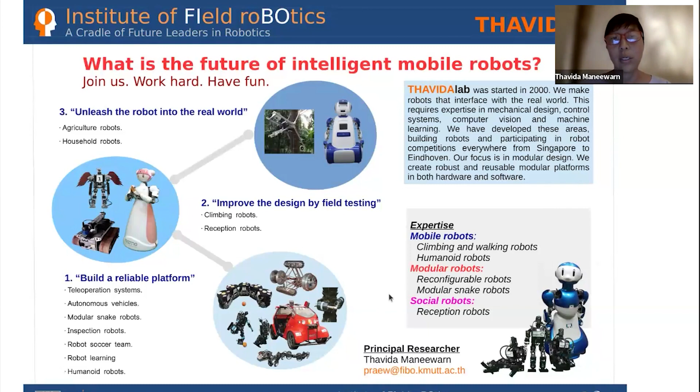That's why I started a company. I worked at Yanix, which is like a visual effects company, doing a lot of 3D reconstruction, camera tracking, and stuff like that using computer vision technology. Today I'll talk mostly about my new company, Raina Robotech, which is the agricultural robotics company. But since you guys are Power Energy Society, I just want to show a little bit of my old robots that I built. This one is for EGAT, the Electricity Generating Authority of Thailand.

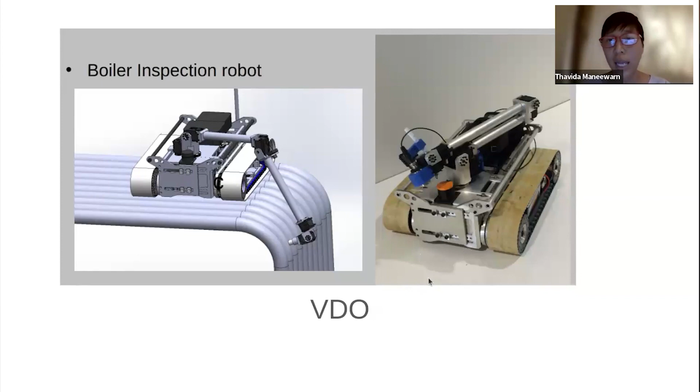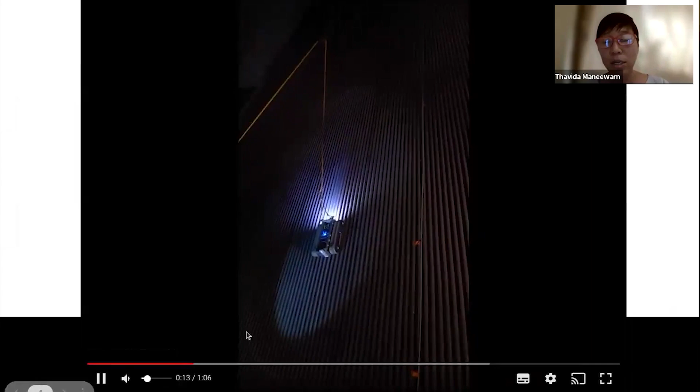So this is the robot that we use to inspect inside the boiler, and it's a climbing robot. So we built a magnetic wheel type robot.

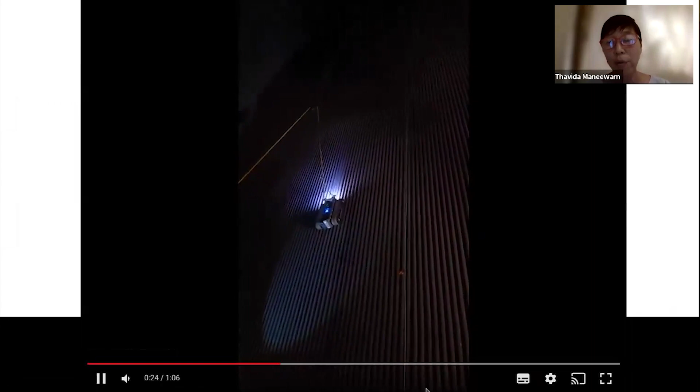So to give you guys some idea, this one we inspect pipe inside the boiler.

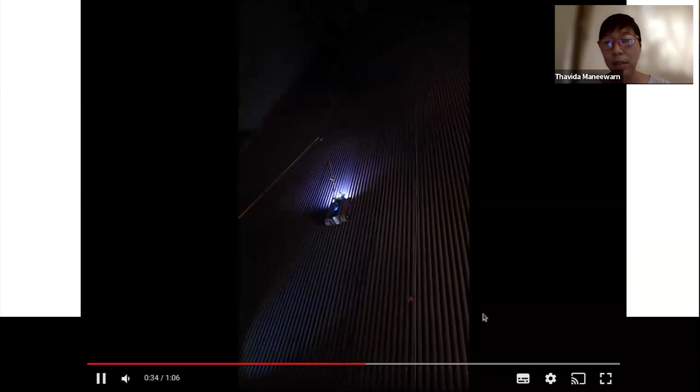Dr. Thavida, just a small question, I hope it's okay.

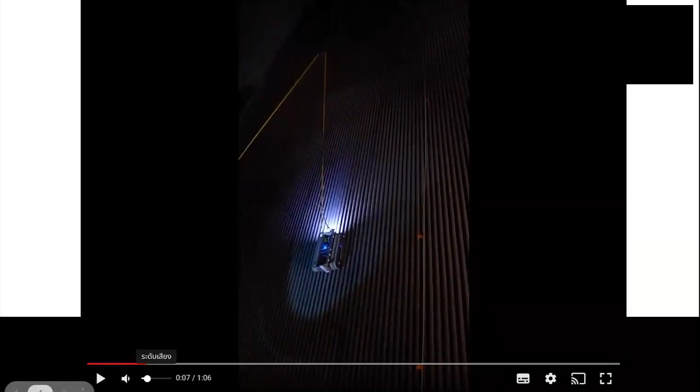Any other thing, like what is the environment temperature in this particular pipe that you operate? Is it just room temperature or different? It's room temperature, because this is inside the boiler. So we only inspect it during the shutdown time. The engineer has to check for corrosion, like if they have to cut the pipe down and then re-weld it. That's why we send up the robot.

So it's about like 5-story high, like 20 meters up. This one we had a certain type of sensor on the arm of the robot, so it can detect the thickness. So it's to test the thickness of the pipe to see corrosion.

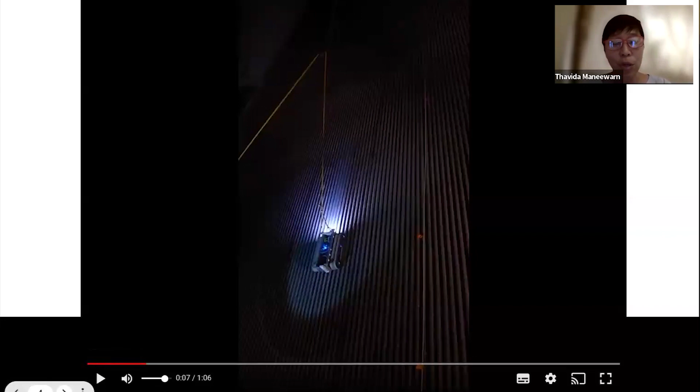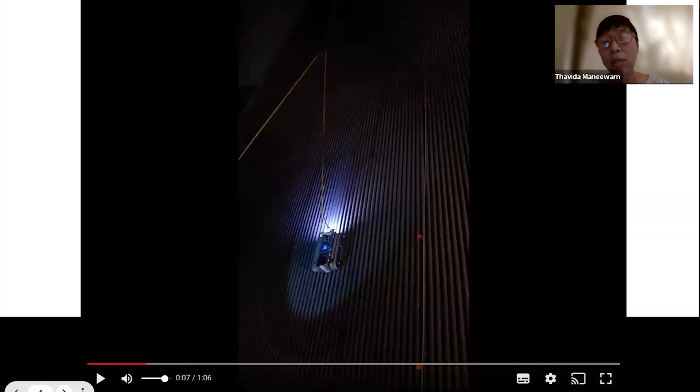But if you look at the future, I can actually talk about the past. This group of work that I did, I call it a service robot that we did for pipe inspection, and sort of like this one is the boiler. So we did a lot of climbing robots for different types of surfaces.

Therefore, to contribute our work into something that can help with sustainability, it's something that we as engineers have to think about, like how can we contribute to a better world. That's why during the COVID year, it's interesting that with COVID everywhere in the world, for me, for example, after sitting at home for a while, I couldn't go out.

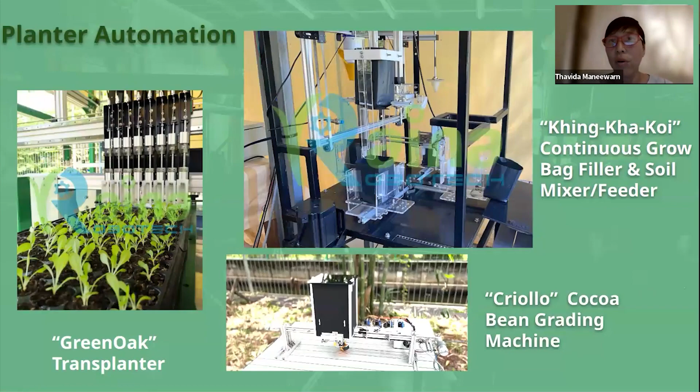Next I'm gonna show some video. Let's see. So let me get back to the beginning. So this one is a cocoa bean grading machine.

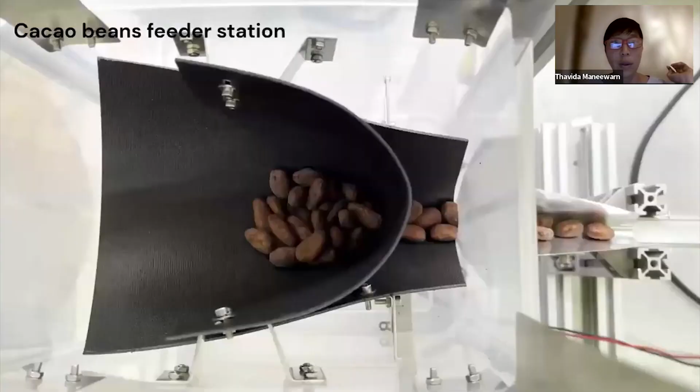We made it very low cost because it's like a prototype that we want to show to the community, the cocoa producer community in Phetchabun. So this one is built very cheaply.

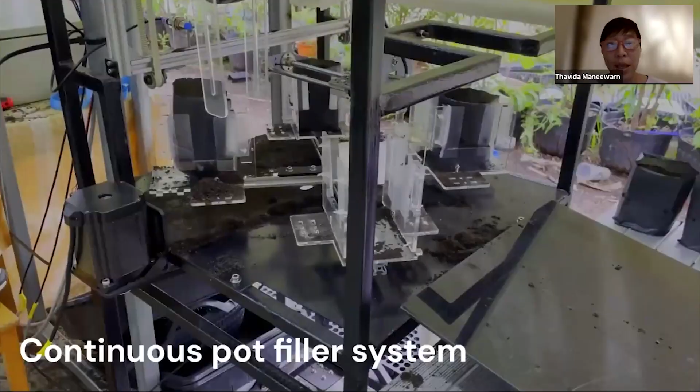So this one is the continuous pot filler. The grow bag feeds one by one continuously, so no human is involved, and then it will fill with soil.

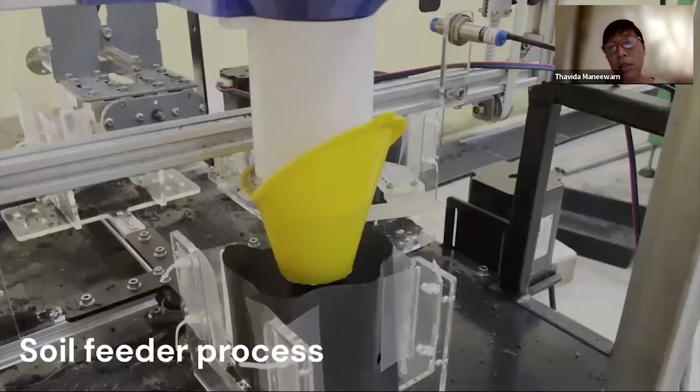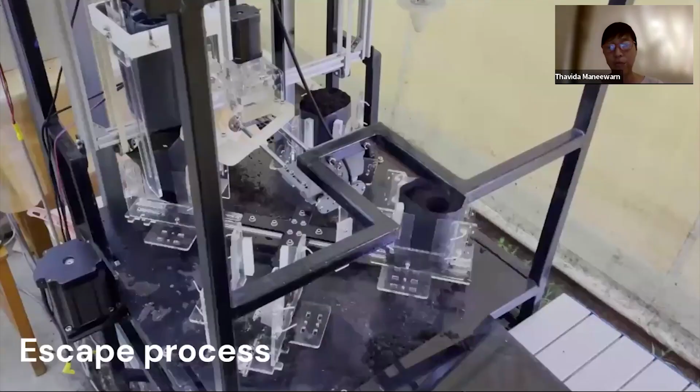So this one, we collaborate with the asparagus farmer. When they start asparagus seeds, they do it in the bag, and we grow the seedling in the bag before planting in the field. That's why we did this for the asparagus farmer in Ratchaburi province.

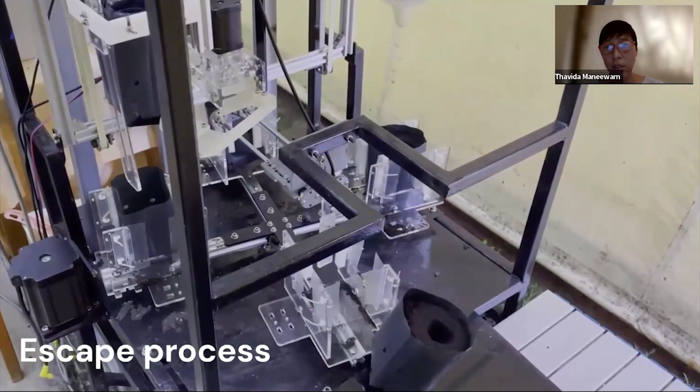Yes, so this is very quiet because it's all electric.

It's slow because of the design, since one of the engineers wanted to make it all like a station. If you want faster production, it's actually better to do it like a line, a feeder line. That's like a circular system, but it's cheaper with one motor to do multiple things.

So 14 or 15 seconds means you get about four bags a minute. That is also a good rate, I guess. Something like that, because their volume is not high, but I'll show you later.

It's our company product, which is the transplanter. That one is a lot faster - it does the seed tray. So the volume of the farmers also determines what the speed of the machine should be.

Okay, go back to the slides again. So the next group of products - we have two lines of product. The previous one is the planter, which is stationary things.

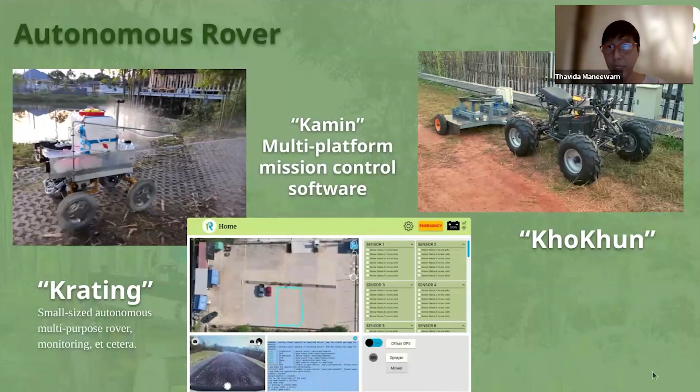So these are my lines of autonomous robot. From testing these robots, the Khokhun prototype we have currently is a two-wheel drive, battery electric, all electric, and it has three modes of operation: manual, so I can ride it like a vehicle, like a small tractor basically.

We equip it with multiple attachments, so you can use it manually, or use it with remote control - the whole vehicle can be remote controlled - and you can also use it in autonomous mode.

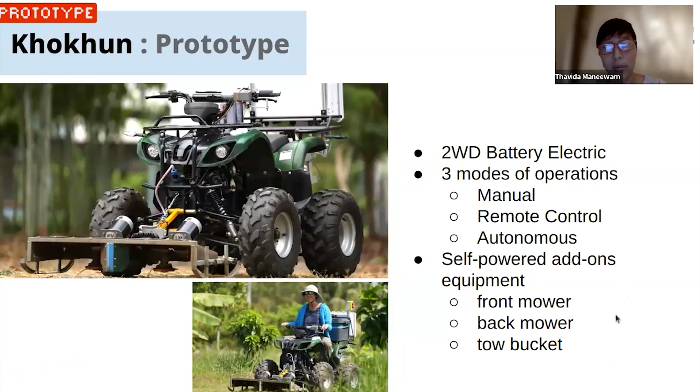The self-power equipment, meaning all the attachments like the front mower, the back mower, the tow bucket and things like that, is all self-powered. So it doesn't require any power from the main vehicle. You can power it differently, and it's all electric, so it's very quiet. In the video later, I will show you when it's done on the farm.

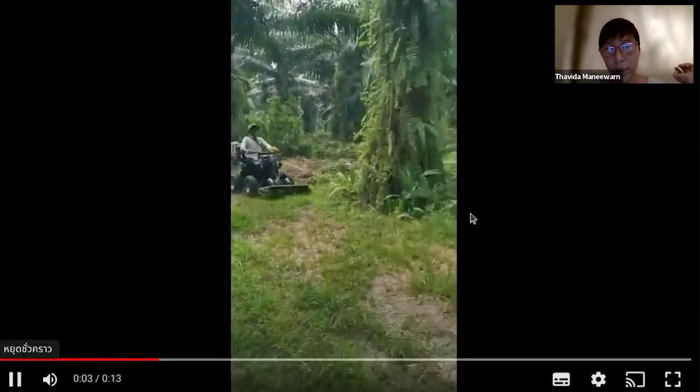For the moment, this is when we had the farmer test it at the palm oil plantation, using it to cut grass.

The good part about this, after learning from using it, is that with electric mower heads and electric machines, the vehicle is a lot quieter, has less heat from the engine, and has a small turning radius.

With the front mower, currently the farmer uses a tractor with a tow cutter, or a back cutter which you can't see. When they want to cut around the tree, it's quite difficult. But with this front mower, they can cut around the tree very easily, and that's one of the advantages of the design.

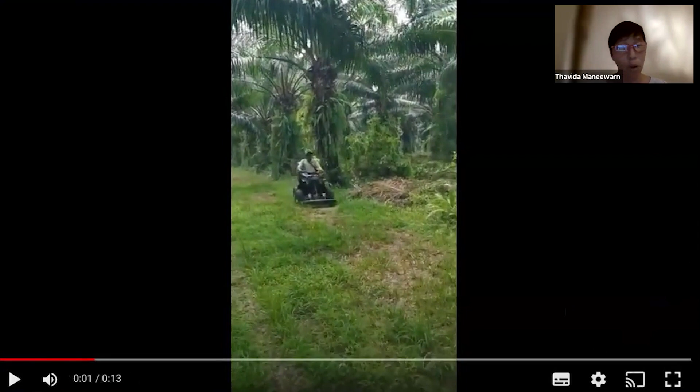And if you don't want to use it anymore, you can take the front mower out and drive the vehicle to the market or to the farm for inspecting.

So here it comes, our first product as a mass production item. We're going to sell this as a multi-purpose EV for farming. The idea is that we strip out the expensive part of the machine, which is the autonomous capability. So the product we sell now will not be autonomous, but this first product will be EV.

Farmers can buy it, and we designed it for use in fruit orchards and plantations, like in the video. We're not focused on building this as a tractor, it's more for orchards, for fruit orchards. So the needs it has to serve are mowing, basically cutting grass, and spreading fertilizer to the trees.

They can also use it for towing and harvesting. This product will be all electric, can have self-power attachments so you can change the front or the back, and it has a swappable battery. So when the farmer wants to drive and power a pump 5 kilometers away, they can do that using this battery.

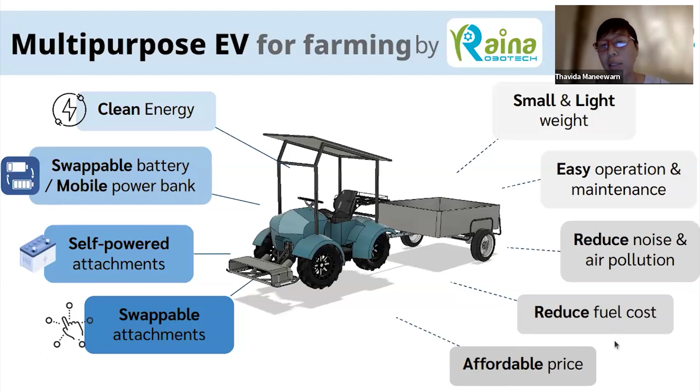The other project that I currently work on and proudly present is the concept of Raina Robofarm. Raina Robofarm is the demo farm, the real farm we built in Bang Mot area in Bangkok. It's circular organic vegetable production, the idea I mentioned in the early slides, that vegetable or food production can be entirely circular.

Why is it circular? Because it's difficult. In Thailand and other countries, the problem in urban farming is that you don't have space and you don't have labor.

There's a lot of waste when we buy vegetables from a market now—everything is packed in plastic, a plastic box or plastic bag, creating a lot of plastic waste.

At Raina Robofarm, we have a new concept: we're going to produce and sell living vegetables in a container. So we don't sell cut vegetables—we sell the whole vegetable in a container, like a pot or a bag.

That way, when a customer buys it, they can either cut the whole thing and eat it right away, or just take some part. If you buy a chili plant, for example, it can last a couple of months—you can pick it when it has chili, then wait and come back again. Or kale can last for a year if you pick it and put it by the balcony with some sun and water. So one plant can last a long time in the container with soil.

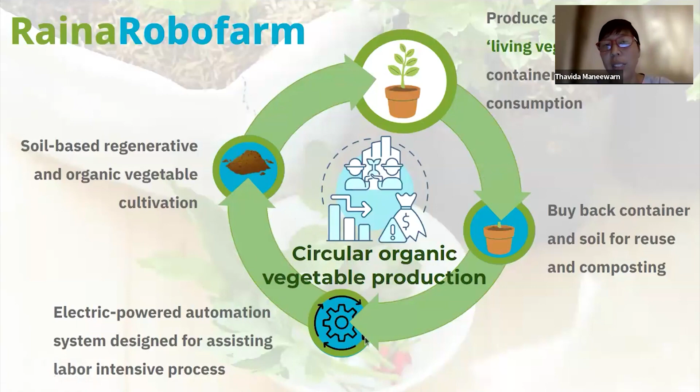Everything is done by electrical power system—all the machinery is electric powered, which is quiet, so it works well in an urban environment and doesn't produce air pollution. That comes back into the soil. So the whole process reuses the soil and the bag—nothing is wasted, everything goes 100% back in a circle. That's the idea of the farm.

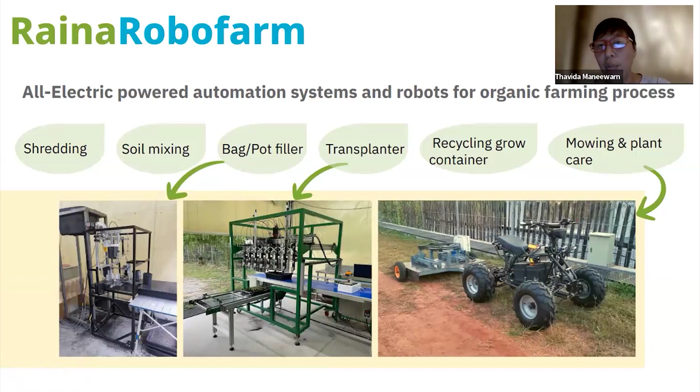At Raina Robofarm currently, we have the process of shredding and mixing soil, putting it in the bag or pot. We have the transplanter, and we have the rover that can help in the farm. It's a demo farm so we can show people how these things work.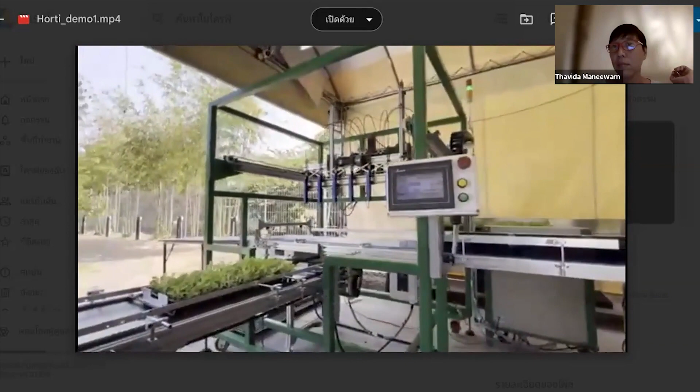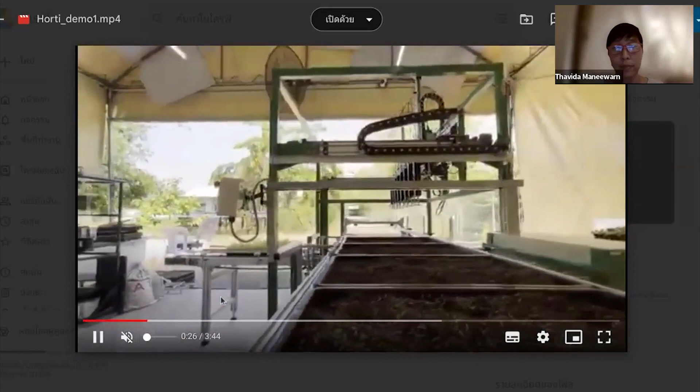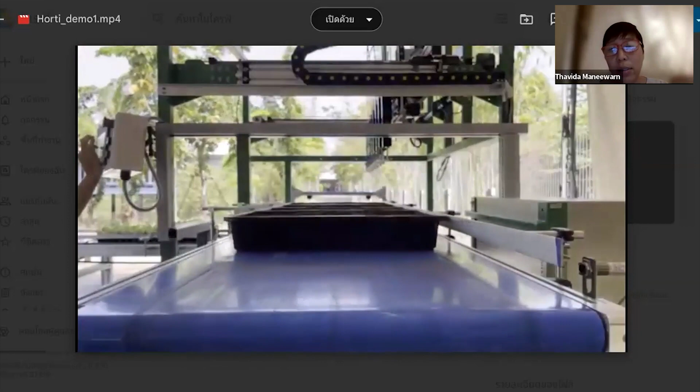This is the transplanter machine at the farm. We prepare soil in the tray, and the vegetable is in the seed plug. When the seed plug is loaded, it will be transplanted into the tray.

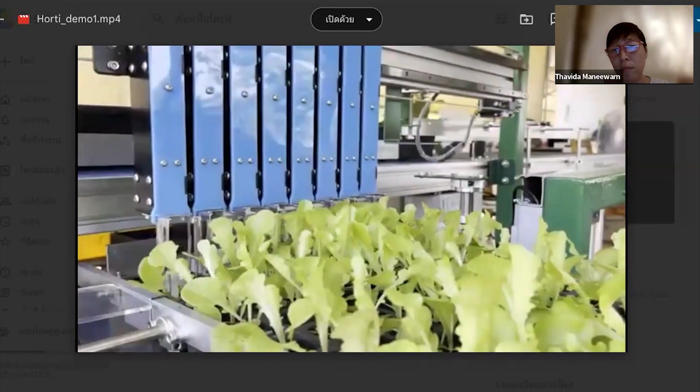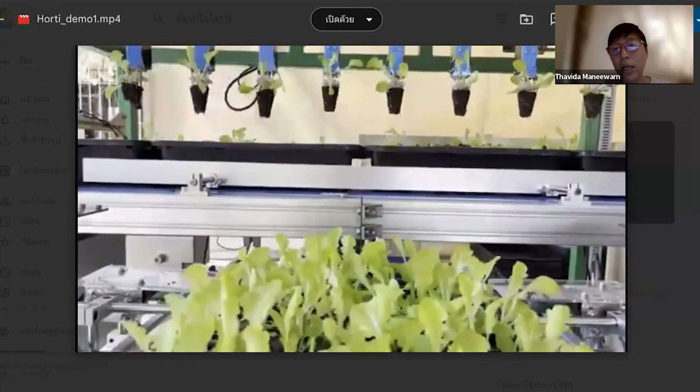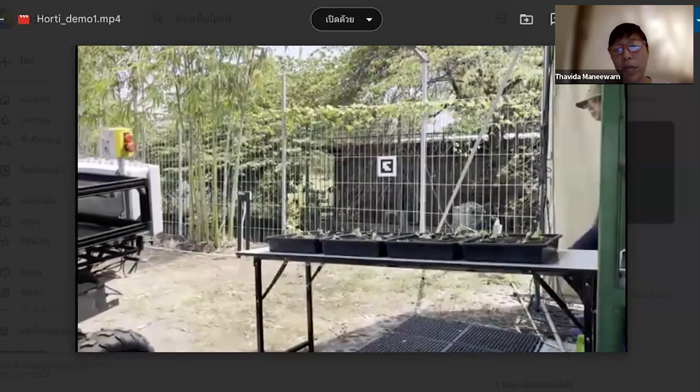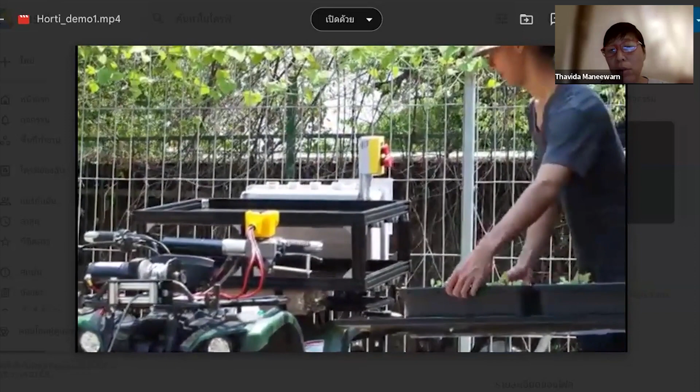After the vegetable is transplanted to the tray, we transport this tray, and the next set of trays comes in to be transported. This isn't fully robotic—we have a human farmer who loads it into a robot, and the robot takes it to the planting station.

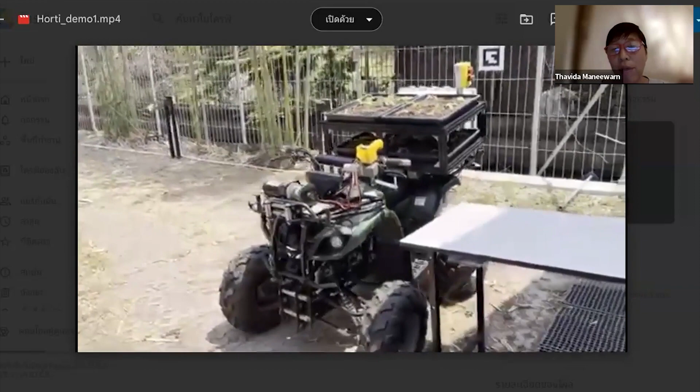From the transplanter, the robot navigates it to the grow area, guiding it there.

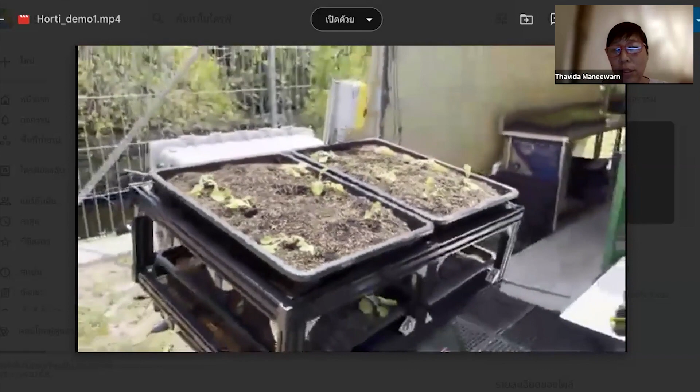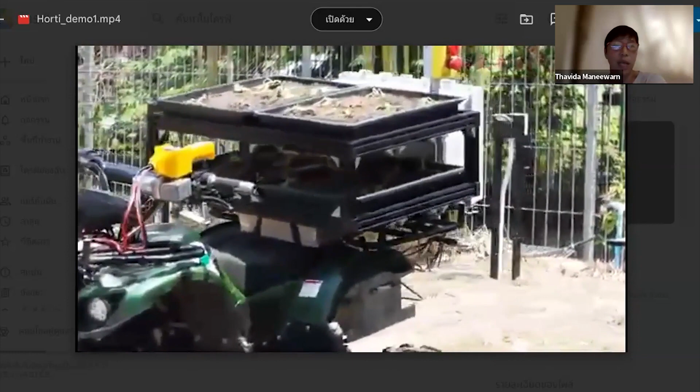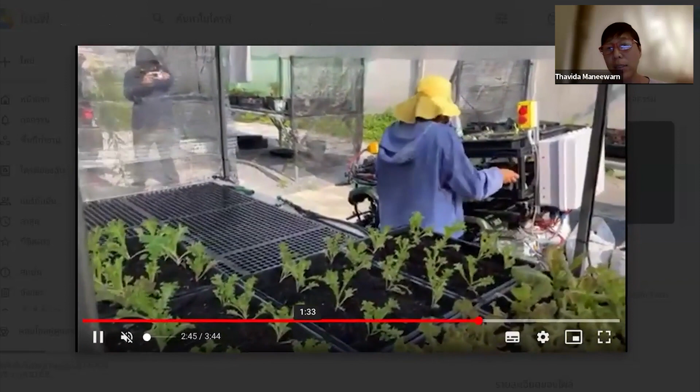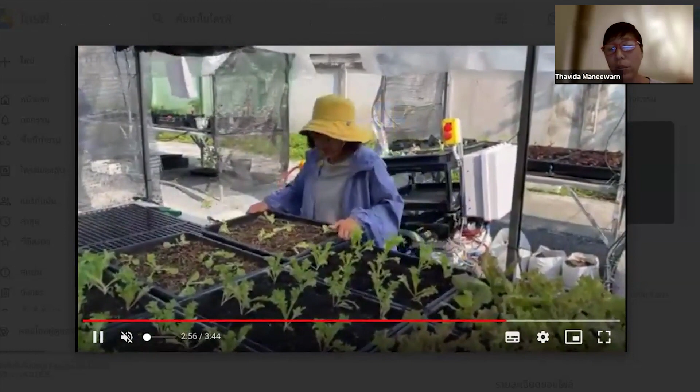Then the farmer unloads the tray into the growing area. There, we've already installed a watering system and a sensor system so we can detect the state of growth, and by doing that we know when the vegetable is ready for consumption and how many plants are ready to sell.

This is the Raina Robo Farm pilot farm in the Bangmot area of Bangkok. So that's my little project called Raina Robo Farm.

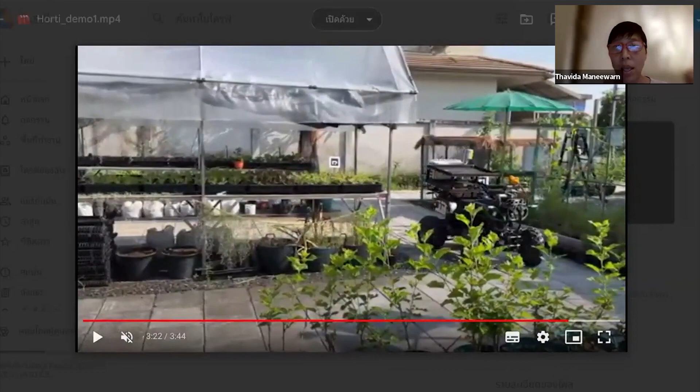With the Raina Robo Farm, we have an application where you can select ready vegetables and collect credits when you return them. People can also volunteer their time to collect credits, so when they purchase produce they can get a lower price by doing work. In the app you can keep track—whether you help in the farm for 15 minutes or 5 hours, it contributes to your credit to buy vegetables.

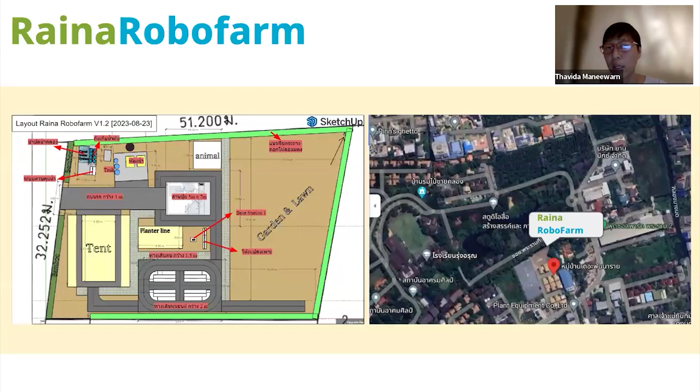This is Raina Robo Farm. If you have a chance to come to the Bangmot area, this is where we are, next to Rungarun School near the Rama 2 area—this is the actual farm location.

I want to show people that we can actually create food in urban communities. The idea is that everyone can grow vegetables, because even if you're young, a woman, not strong, or have health problems, you can still be part of the farm and help a little bit. We use these activities to introduce people to how to relax in nature.

Kids can also see actual agricultural innovation at the farm that is 100% designed and built in Thailand. It becomes a learning space for both agriculture and technology, and shows the cost savings in vegetable production and waste, so instead of buying plastic bags to put food in, you don't have to do that anymore.

That reduces the cost in production, and when you keep vegetables in the soil instead of the fridge, you don't have to use energy for that. So this changes the behavior of people when they consume vegetables in urban areas, and that's what we want to achieve.